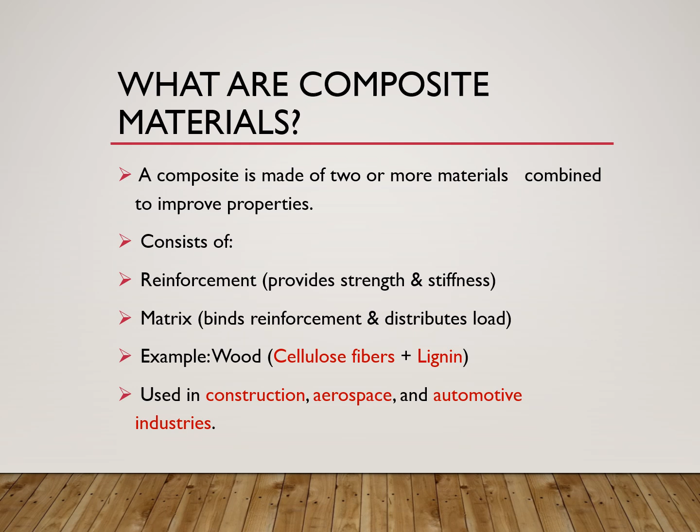A typical example is wood, which is made up of cellulose fiber and lignin. These composite materials are highly applicable and useful in domains such as construction, aerospace, automotive, etc.

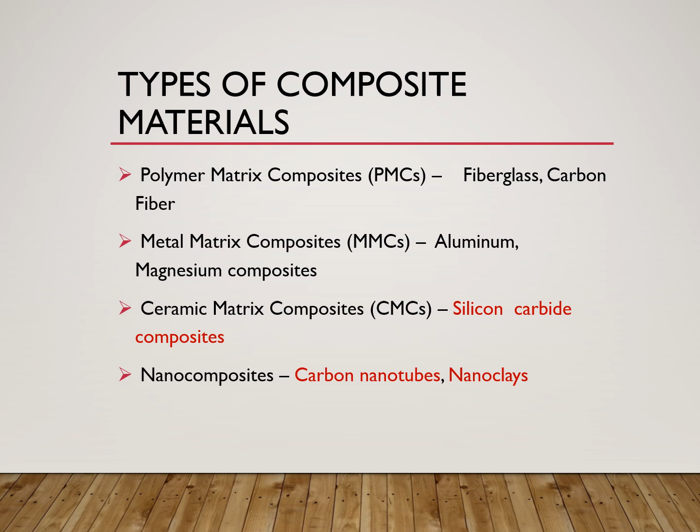Types of composite materials: we can classify them into four types. PMCs, which is polymer matrix composites - example is carbon based fiber. Metal matrix composites are another type - magnesium and aluminum based composites are typical examples. Ceramic matrix composites - example is silicon carbide composites. Finally, nanocomposites - simply nanoclays and CNTs.

The physics of composite materials: this section covers the fundamental physics formulas we already know - stress, strain, Young's modulus - which we studied in classes 10th, 11th, 12th, and even in UG. This basic form of stress-strain relationships and these properties are highly used in composite materials.

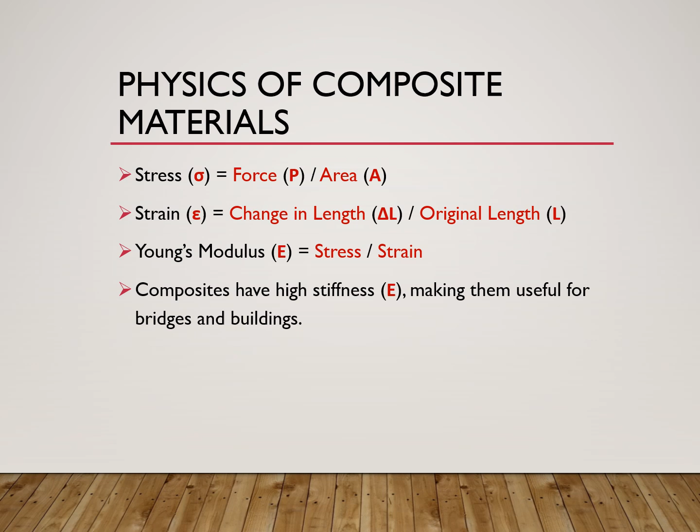To get very high stiffness, which helps us in making bridges and buildings. Applications involve bridges and buildings, as we discussed, apart from polymer based roads, also in aerospace and many other domains. Especially in aerospace applications, more than 50% of composite materials are used - so more than half is composite materials.

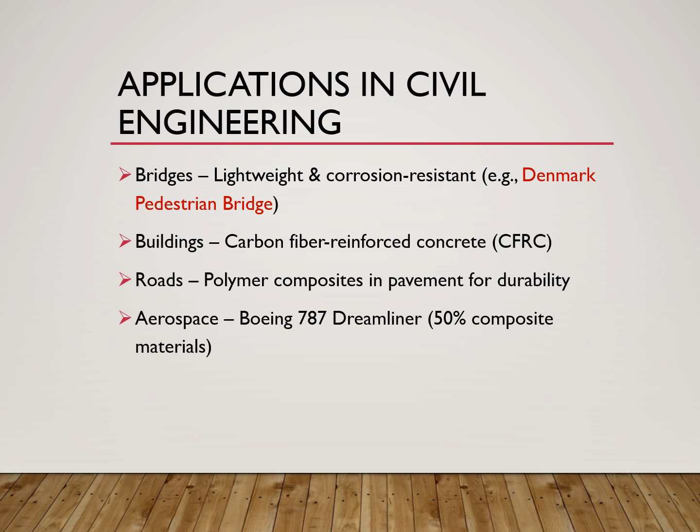Advantages and challenges: since these materials have their own advantages, I would like to start with the high strength to weight ratio. They won't get corroded easily, so corrosion resistance is high, along with long durability and therefore low maintenance.

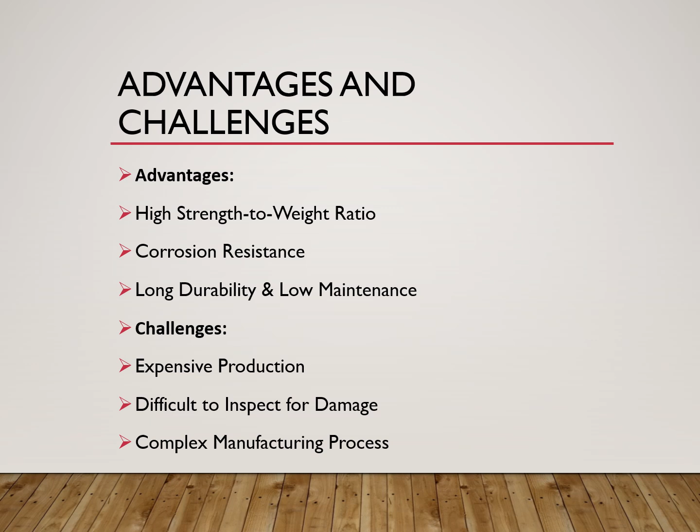On the other hand, the challenges include expensive production, difficulty in terms of damage, and finally the manufacturing process is tedious or complex.

The future is heading towards maximum use of composites, and it encompasses self-healing composites - materials which have the tendency to repair themselves. Also green composites, where eco-friendly biodegradable composites play an influential role.

Smart composites, which can change their behavior with respect to external factors. And finally CNTs, which are 100 times stronger than steel, used in aerospace and space applications.

A small reminder - I would like to insinuate the fact that these nanotubes play a vital role in aerospace engineering, because as we already discussed, aerospace application consists of more than 50% composite materials, and therefore CNT plays a vital role.

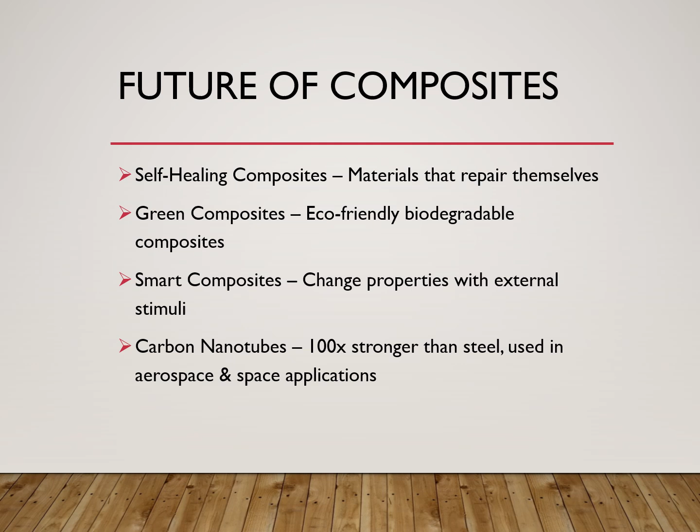Conclusion: I would like to conclude such that composite materials are combined with the materials to get better output, to enhance the strength as well as the durability.

Also, understanding stress, strain and modulus is very essential. The reason I mention it is very essential is that it involves many basic fundamental concepts. If we are strong in fundamentals only, we can achieve something, and we need to take care of this part more.

It is highly used in bridges, buildings, vehicles and aerospace, as we discussed earlier. Also, I would like to share that future innovation will shape the next generation, especially in construction of further materials, because these composite materials are highly applicable to the civil department or civil construction domain.

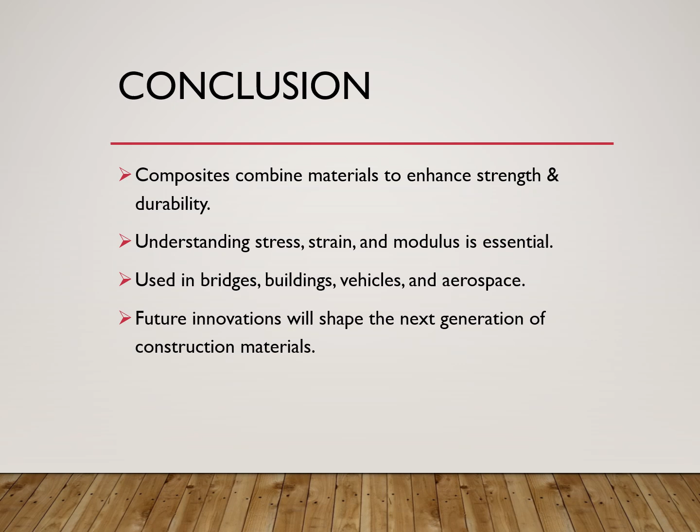Therefore, the future is in safe hands, and the future will entirely, or maximum, depend on composite and composite-based materials. Thank you.